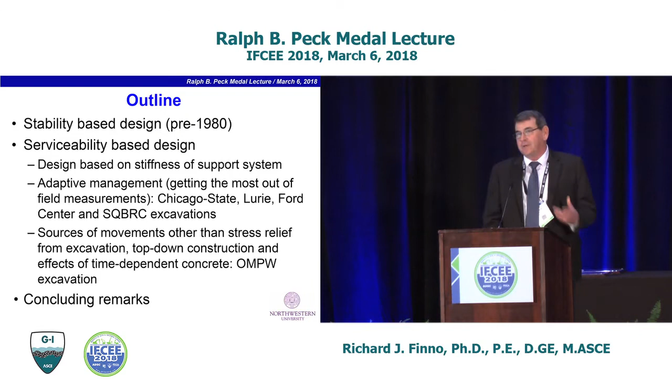That in itself could easily be another lecture. I'll give one example related to top-down construction and how the time-dependent response of concrete can impact lateral movements, and then make some concluding remarks.

It's been known for a long time that if we look at theoretical earth pressure diagrams for sands, like the Rankine diagram, they provide a distribution of lateral pressures where soil pressure increases with depth. Experience showed that this didn't really work for designing supports for excavations in sand. The pressures were actually higher at the top of the cut and lower at the bottom of the cut for excavations in sand.

This was noted by Terzaghi as early as 1936.

I think this is a common problem in geotechnical engineering, and in fact it probably extends to many other things in life, where the great philosopher Yogi Berra said: in theory there's no difference between theory and practice, but in practice there is. He must have been a geotechnical engineer at heart, I think.

So Professor Peck came up with the apparent earth pressure diagrams, the Terzaghi and Peck diagrams. Basically, he solved this not theoretically, but by looking at field performance data. They measured loads in cross-lot braces from a number of sites, and he looked at different soil conditions, sands.

He decided to break it up into sands, stiff clays, and soft clays. At excavation, he would look at the loads in the brace, divide by the tributary area to come up with some pressures, select the maximum apparent envelope pressure at each level, and then for all excavations in a given soil type, define the envelope of maxima.

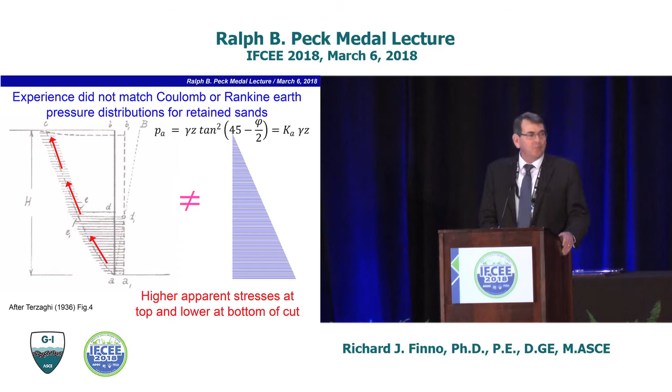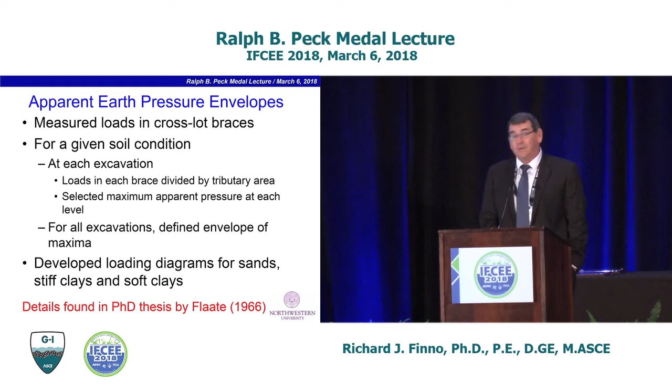All the details of this can be found in a PhD thesis from 1966 by Flaate at the University of Illinois, a very excellent document. If you have the time, take a look at that.

Here's one of the diagrams for soft clays. You can see the database was extensive, nine from Chicago, and those mostly came from cut-and-cover tunneling and the stations in Chicago, from Professor Peck's experience as an assistant subway engineer.

9 from Oslo, 4 from Japan, and 1 from England.

A very simple diagram, a trapezoidal diagram. The ordinate of the pressure is equal to the hydrostatic pressure ratio, not the active earth pressure coefficient, but the hydrostatic pressure ratio as they defined it. That was equal to a function of the undrained strength of the material above the bottom of the cut, the average undrained strength of the material above the bottom of the cut.

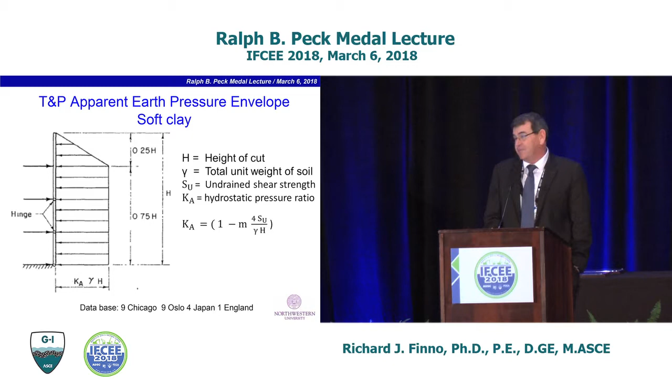This became the standard for designing excavations. One of the reasons you had to go to this approach is that there was quite a bit of variability, and there are many factors that affect strut loads, aside from the obvious earth and water pressures at the time.

Workmanship matters - some of the details can be off, maybe they don't brace very well and you don't get the wales up against the struts or against the wall.

We can look at preloading. You can preload, or you cannot preload. You can preload like this by using two spreaders and spreading apart the wales, or you could put a jack on an individual cross lot. The amount of preload has an impact on the loads that remain in the strut.

Also, in many environments, temperature is very important, particularly if you put your cross lot in during cold weather and it's in service all the way to warm weather. Steel tends to expand, it pushes against the reaction against the wall, and you get some very high pressures there.

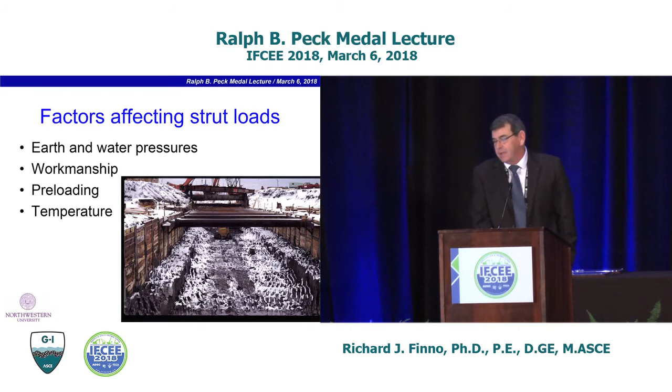All these things make it very difficult to theoretically predict any kind of earth pressures on the support elements. Those diagrams have worked well, and they're still in practice for flexible excavations today in many places.

Most of the data fell in zone 1, but as you got softer clays, you fell into zone 2 or zone 3 with very soft clays to a large depth below the cut.

When those diagrams were first developed, the very soft clays in zone 3 were really Mexico City.

You could also get into zone 3 if you had other problems besides just excavation relief. In particular in Chicago, if you had problems with caisson installation where you had significant soil squeeze while putting in drilled shafts - part of the foundation for the building - or if you had water problems and had to pump from the bottom of the casing, taking out fines, you could get yourself into zone 3 even within very good soil conditions.

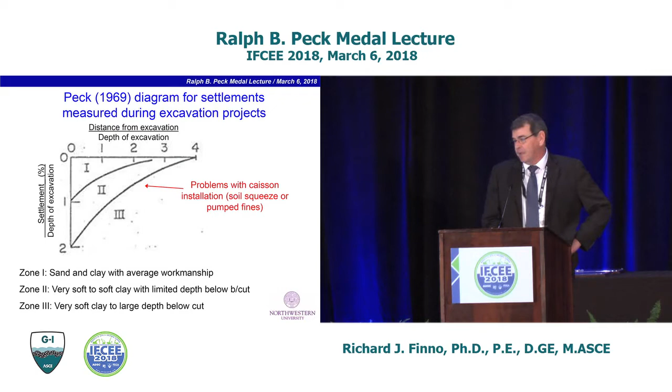What you see is a localized failure - the wale is kind of buckled up there, but it was not really a problem. Because the system was so redundant, the load was transferred to the adjacent wales and the crosslots, they put a little T section at the top, and it was fine. The excavation, in terms of stability, was fine.

Picture that back in the pre-1980s - this was pretty common.

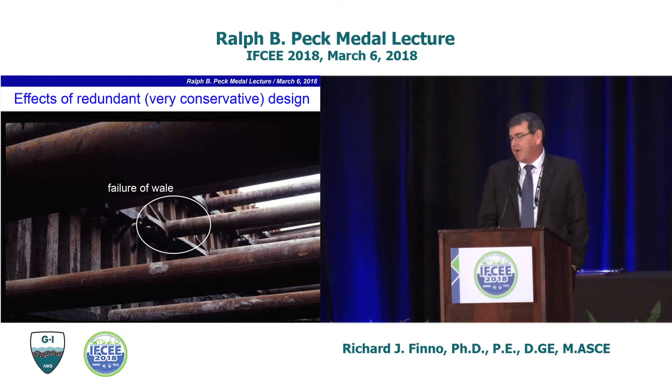So if we summarize stability-based design: first, it arose from field measurements of the loads in bracing, and that was Professor Peck's main contribution. It is a conservative design based on apparent earth pressure envelopes, and it generally leads to a very redundant system. At the time, there was no real serious consideration about the movements that occurred when you made an excavation.

Now that all changed as the 1980s developed - in the 1970s, when deeper excavations were made in urban areas, you started impacting adjacent buildings and causing damage. So it became apparent that there had to be some sort of design for ground movements.

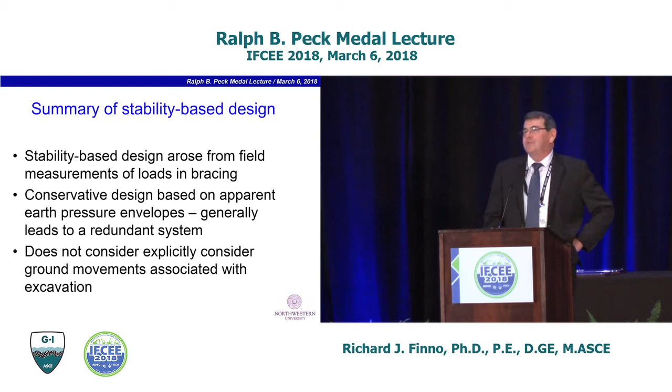If I call it a serviceability-based design, you want to select the support components to maintain ground movements to acceptable levels. Now those acceptable levels, we could easily spend an hour talking about what is an acceptable level for a given excavation in a given situation. We will assume for this talk that we know what that is and we're going to design to that level.

The serviceability-based design really became possible when people started applying finite elements to excavation support problems, particularly the work by Clough and his co-workers in the 80s, which resulted in a semi-empirical approach based on system stiffness and factors of safety against basal heave. Their approach was for clay excavations only.

And today I think it's a true statement that you are not only using finite elements to estimate movements, but you're using it—I've seen it used many a time—to compute the support loads in the bracing, okay?

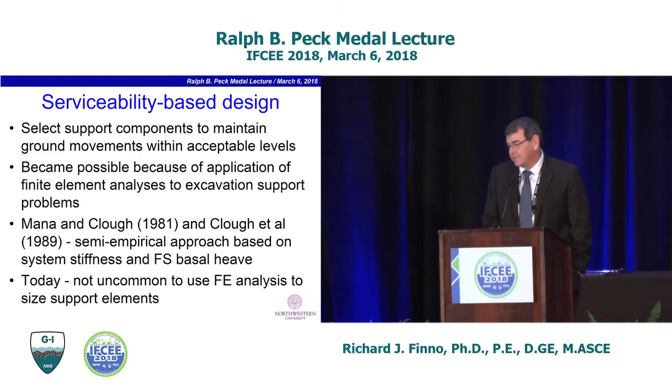So in the 80s then, there was much effort for this, and Clough and O'Rourke in 1990 presented an excellent paper in the Lateral Earth Pressure Conference of that year.

Keeping the same zones of settlement as Peck did, they looked at the plot, the settlement versus the excavation depth. It's the same plot, I think a much better plot because you see where the data falls. They looked at, in this case, about 15 case studies, plotted the data up, and that's a lot of movement, quite a bit of variation.

So one question you might ask: why is all the emphasis on soft clays? Well, if you look at—they did the same thing for the sands and the stiff clays—and if you look at the magnitudes of the movements there, the envelope of the settlements, maximum is typically 0.3% for sands and hard clays, and more likely 0.15 to 0.2% for the movement. So clearly, you get much bigger movements in soft clays, and that's why there's so much emphasis in this area, okay?

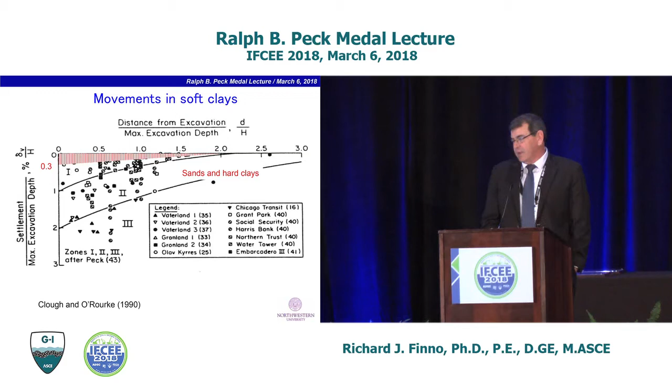So since I'm going to talk about excavations in Chicago, I only want to really talk about the stratigraphy once, so we don't have to look at it again. There's obviously minor variations, but classically you've got an urban fill at the ground surface, overlying a sequence of increasingly stiff glacial deposits.

Sometimes, not all the time, but sometimes there's a desiccated clay crust at the surface, followed by sequences of increasingly strong and stiff clays.

One thing you notice: the Blodgett stratum is the softest of the clays, other than some infills from old channels, and has very high variability in water content. This comes from the fact that this typically is thought to be, anyway, a supraglacial till.

Below that, there's a Deerfield stratum, which is a medium stiff clay noted by very uniform water contents. Below that is the last of what Peck called in 1954 the lake border clays, the Park Ridge stratum, which is also a glacial deposit, over basal tills, locally known in Chicago as hardpan, which can be extremely strong. So that's the basic idea.

Most of the excavations of typical depth bottom out in the Deerfield stratum. So you've got some relatively soft clays below the stratum, and depending on where you're at, that could be significant for relatively significant depths or not.

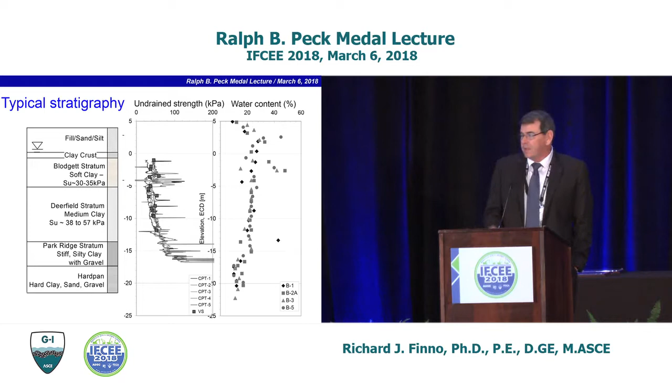So to make movement predictions then, it really depends on the soil conditions, the retention system stiffness, and of course the construction procedure. That can have an overriding effect on anything that we do.

And so I think it's always wise to make this a two-step process. One, look at precedent—many people have done work on making compilations of movements in excavations since Clough and O'Rourke, but there are essential findings that keep being substantiated. So you can look at precedent to get some idea, but you really need to look at some site-specific conditions for a number of reasons.

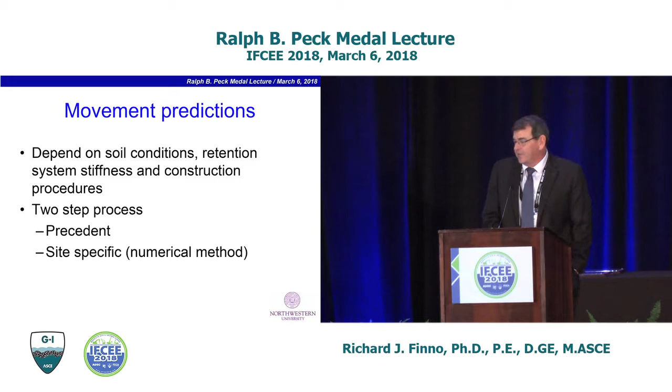And typically that's done generally with a numerical method. So if you're going to do a numerical method, the goal is to make whatever goes on out in the field go on in your computer. You have to be able to accurately simulate construction and have proper finite element procedures, and your constitutive model has to be good enough to represent the response you're trying to represent in the field. So we'll have a little bit more about that later.

And of course, when you're doing this, you need to have instrumentation and field verification. So this is where the field performance and the case histories become extremely important.

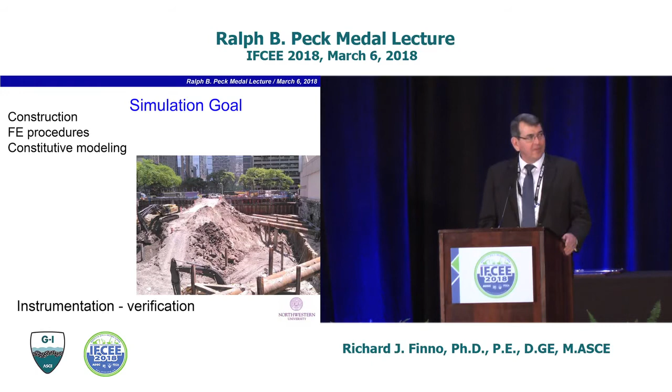I'll first start with the Chicago State excavation. I will talk about several excavations, but one is the excavation that took place at the Chicago State, for the renovation of the Chicago State subway station, which was one of the cases that turned up in the Terzaghi and Peck loading diagram.

The excavation is in front of a 3-story building, the Frances Xavier Warde School. That part of the excavation was a tunnel, designed and constructed with a tunneling operation. The goal here turned out to be about a 40-foot cut, and the 3-story school is founded on shallow foundations. The Holy Name Cathedral, the larger building behind it, was on drilled shafts and wasn't really an issue.

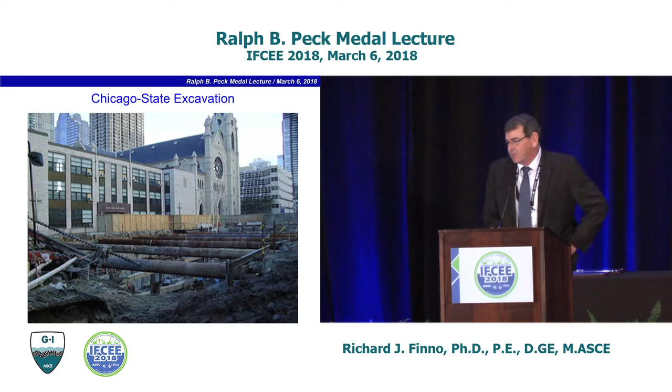Here's the picture of the support system. You can see it's a cross-lot brace at the top with 2 levels of ground anchors, with the existing tunnel that was going to be renovated below that. The Warde School had a one-story basement, about a 14-foot deep cut, so for a 3-story building you're getting a net stress relief on that side compared to the other side of the excavation, which was basically a parking lot. So there were higher stresses on the left side than on the right side of the figure, and you can see the typical soil conditions.

The goal for this support system was value engineering as a last-minute change, because the original design was rejected, and there was no time for any really detailed analysis. This was around the 1990s because of the time constraint. So basically the design was done with the Clough empirical charts and an analysis by a structural engineer of how those perceived deformations would impact the adjacent school.

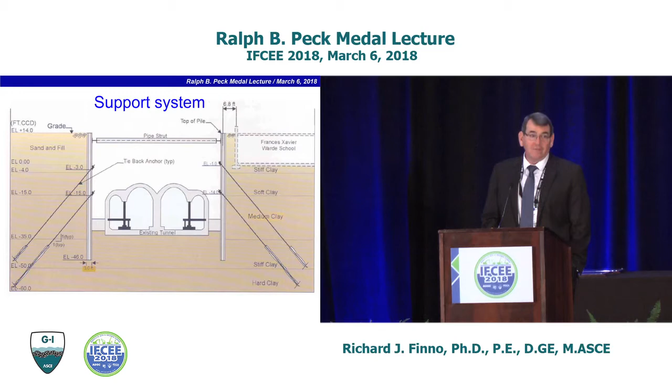We came up with an allowable settlement of 1 1/4 inches. At this time, that was beyond what we were typically getting in Chicago, so there was a very detailed monitoring program.

What you see in red are locations of inclinometers, 3 on the side between the secant pile wall and the school building. The W's and C's are locations of settlement points on the walls and columns in the basement of the structure. Those were monitored weekly throughout construction, and the inclinometers were read several times a week.

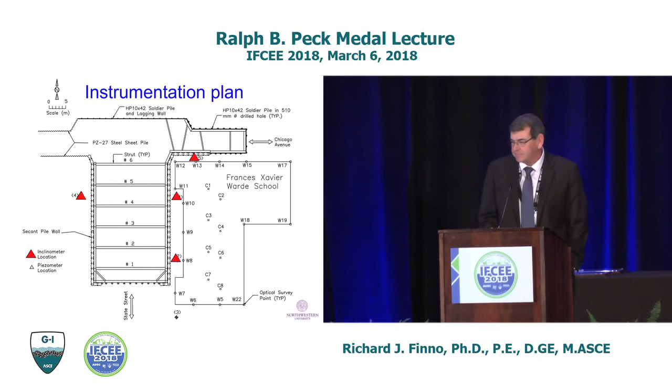This figure is detailed, but it shows everything, and I include it because it's very important to have a very detailed record of construction that you won't find in the daily field reports. You have to look at what the excavation level was at the particular instrument, as well as what was going on in terms of installing a brace.

The markers up there represent when the secant pile wall is installed, and the solid line is the excavation level throughout the process. The sequence was: install, excavate below the first level brace, put the first level brace in, excavate below the first tieback level, install the last tieback level, and then when finally done, reach bottom grade. Then it was open for a long period of time without making a good connection, so there were maybe some minor movements.

What you're seeing is a movement summary on the bottom, lateral movement or vertical movement, with lateral movement shown as colored dots. Those colored dots represent the lateral movements of the inclinometer between the wall and the school at different elevations.

Elevation -3.7, the top blue one, was in the soft clay and represented the maximum movement throughout the process. The other two are at lower depths, with the last one at 11 basically at the bottom of the cut. There was also the school settlement marked by W10, on the lower part of the wall right adjacent to the inclinometer, which tracked the lateral movement in the soft clays.

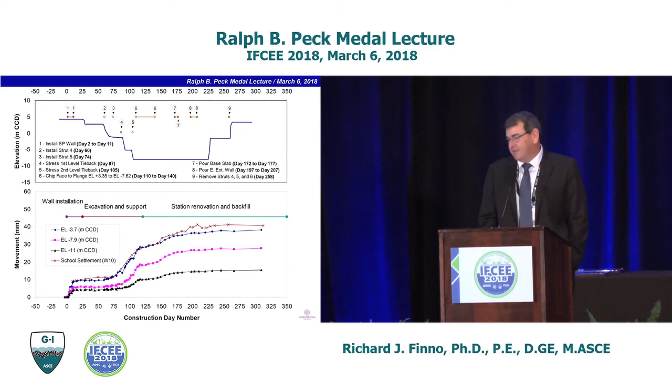So how did this look in terms of more conventional inclinometer and settlement data? Well, this is one of the inclinometers between the school and the secant pile wall on the east side, and you can see that the first data set represents the entire lateral movement during installing the secant piles, and the movement was about 10 millimeters, again, focused in the soft clay. As the clay got stiffer, there were still movements, but they were smaller. And that deformation pattern was reflected in the settlement of the columns in the Warde School.

And then if we looked at the excavation, we got the same sort of thing. Another 20 millimeters of movement maximum, and reflected in 20 millimeters settlement. So these aren't all the inclinometer data, but this is enough to show the general trend.

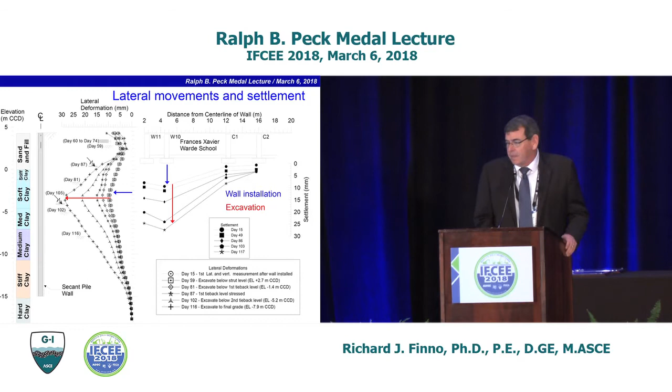So if we just summarize this stiffness-based support, the design and support system, first of all, necessitated detailed performance monitoring. There were provisions in there that if you had to add another tieback level, you could. But the movement levels, initially, was very concerning, but then it became, by basically nothing more than compensating errors, because we forgot to add in the secant pile movement, we under-predicted the movements due to the excavation, and so it worked out fine. Like many things, you'd rather be lucky than good.

So the requirement then, though, because we were looking at such small movements, allowable movement of 1¼ inch was pretty unprecedented in Chicago at the time, and you really have to think about all the different sources of movement. And so the secant pile wall installation and the long-term movements were something that eventually have to be considered.

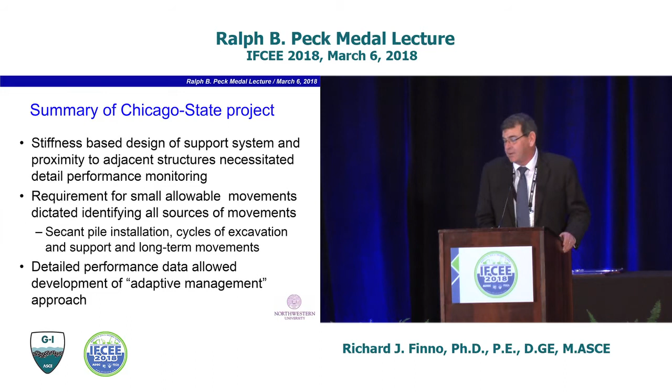But what I brought this case up for to start with is that because we had this detailed data, it allowed us to develop what I might call an adaptive management approach to this. So basically what this does is you quantitatively evaluate the performance of a system based on field observations. And if you make these observations early enough, you can use these observations to update your performance predictions, and you plan the project so that alternate procedures can be applied depending on the observed performance. So this is definitely a design approach.

You think about these things in the beginning, you make your predictions, you get your target levels, and you provide alternatives at that time. The Chicago State project, for instance, it was clear that we were never going to prevent any kind of damage in that building. The target was some minor architectural damage, which I'd like to present, but not enough time.

So the fact was, though, that by doing that, at the beginning, the contractor was allowed to put in a bid item in his package to allow to pay for any damage to the structure. And between that cost plus the cost of the secant pile wall was much cheaper, saved a lot of money compared to, say, a structural slurry wall that was a possibility. And, well, it was still much cheaper. And I don't know if you would have gotten less movements with the structural slurry wall in any case.

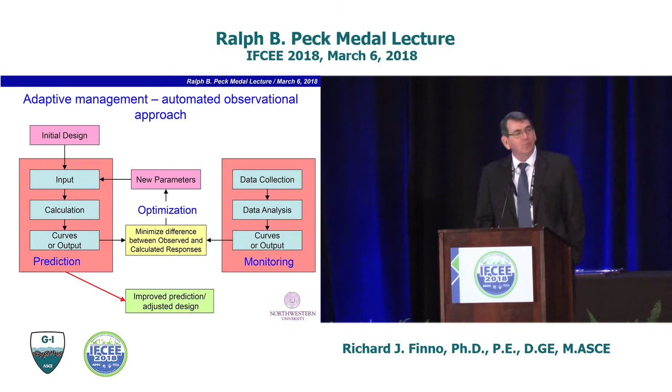So then what we do is compare those two. We minimize the difference between the computed and observed responses using an optimization routine, develop new parameters, and with those new parameters you can predict the performance as you go on.

So I just want to show exactly what I mean by this. You start out with a finite element run, and you compute an objective function. That objective function is nothing more than, y is the observed lateral movement at depth, and y prime is the computed value, and y prime sub b is the computed value as a result of a change in b, which is one of the performance prediction parameters. So that's the sum of the squares for the objective function we're using, and W is a weighting function.

To do that, we use a gradient method for optimization, where you compute the sensitivity. For each particular parameter, say a stiffness parameter in 3 or 4 layers, you perturb it by a small amount. That's the only thing you change in your simulation. You get your change in the response you're trying to get, in this case lateral movement with depth, and you use that to come up with the sensitivity matrix, the rate of change of the value with respect to the change in the property.

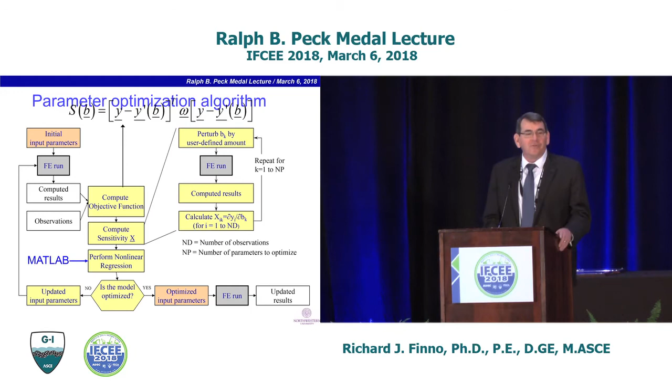So we do that, say 5 times if we have 5 different parameters, and once you get that you perform your nonlinear regression with that sensitivity matrix. That can be done with MATLAB, it's a standard off-the-shelf procedure now. Then you check if the model's optimized. If it is, you come up with your new parameters and make a new finite element run. This whole sequence can be linked together with macro programming languages, and it takes 4 to 5 hours on a PC for a 2D run. So it's something that's very reasonable to get.

So the key elements of the approach are, first of all, the prediction method, the finite element method. But keep in mind you can't always get all aspects of the construction process modeled correctly. You have to have the observations reliable, accurate, and in timely fashion. When we started this business, this was the hardest part, getting the data back. If some outside agency took inclinometer or survey readings, you wouldn't see it for 2 weeks, and by then you were gone and there was nothing you could do about it. Nowadays things have picked up considerably, and we'll talk about that later. The constitutive model has to have the capability to replicate the behavior you're trying to observe, and what's really good about this is, remember, when you start out in design, you have to predict the construction procedure, which is as hard as anything else in our experience.

But the value of this is that when you come to making the analysis at a given stage, you take the records, you know the construction procedure, so that becomes a known and not unknown. The other thing is the contingency, to make this work at all you have to think about this in design and have your contingency options prepared in the design phase of the project.

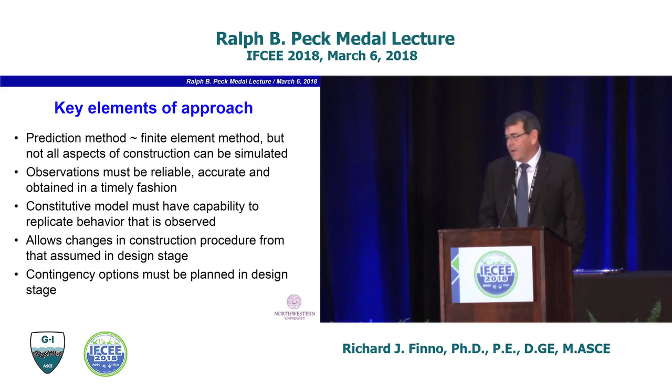So I just want to show very quickly how this was used, again this is the Chicago State project, where we optimized the parameters at an early stage of excavation to come up with the predictions later on. We used the computer code Plaxis, Plaxis 2D, I forget what version because it was a while ago. We used MATLAB for the optimization routine, and the hardening soil model, which is a nonlinear elastoplastic model. We used a stiffness parameter called E50 reference. That E50 reference is kind of a plasticity parameter, not an elastic parameter, but basically the secant stiffness at 50% stress level. The reference refers to the fact that you can relate that to the vertical effective stress, so one parameter can go for a soil deposit where the stiffness increases with depth. That's a stiffness parameter, and you do that for several soil layers.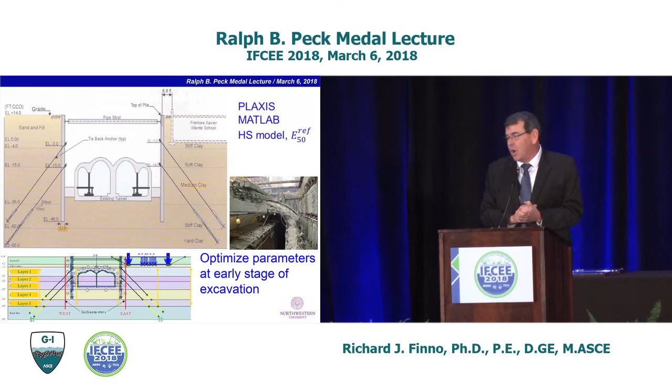The model we had is seen here, and what you can see is that these red lines represent the 2 inclinometers, one on each side of the excavation, that were used as the basis of the prediction. So those were our observations, we had data on both sides of the excavation. The simulation included simulating the tunnel to get the right stresses in the ground, simulating the construction of the school, simulating the excavation and installation of the walls, and then the normal excavation sequence.

So here's the first set. We started with soil parameters that came from tube samples, fixed piston samples, even in the soft clay, without any corrections, because we knew there would be some disturbance. Typically you're going to get a softer response predicted directly from the laboratory results, no matter how careful you are. So what you can see on the top row is the 5 stages.

Stage 1 is installing the secant pile wall. Stages 2, 3, and 4 are when the excavation was below each level of support, and stage 5 was at the bottom of the excavation.

On the east side, those were all 5 stages, but the inclinometer was protected between the school and the wall, with no construction equipment. For anybody that's worked in these situations, you know that if you're not really careful and you leave instruments exposed, they tend to be destroyed. So we made the inclinometer on the west side of the wall last through only 3 stages of excavation, so we at least have that data.

The solid dots represent the observations from the inclinometers, and the predicted are the open symbols. Clearly we got larger deformations predicted using the exact construction procedure, and this is after the fact.

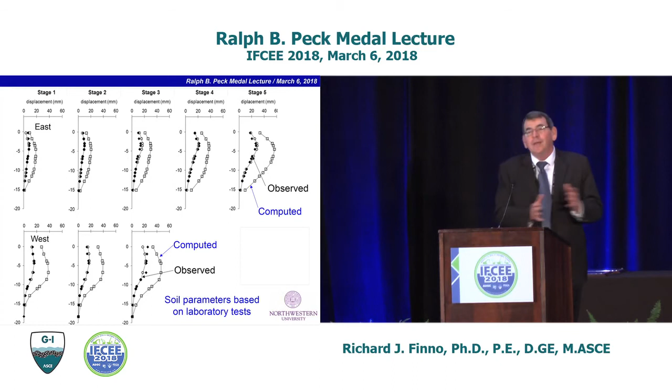So again, soil parameters are based on laboratory tests, and we wanted to know this when we were starting out, because we knew the correction should be the other way. We would think that if we start with a softer parameter, the parameter should get stiffer, so we know kind of what's going on.

So what we did then was use that first stage as the optimization, when the secant pile wall was put in, and optimize that data set — inclinometer on one side of the wall, inclinometer on the other side. We got best fit parameters based on that, and ran through our analysis.

And of course, for the first one it's a good fit because you're making it match, all right? But then for the rest it's not a prediction, it's a computation based on the results of the first analysis, stage 1, and you can see the improvement is significant.

In fact, we're able to pick up, say, if you look at stage 3, by that time you even have more movements on the west side due to the larger loads there than on the east side. That was picked up with the simulation and the parameters that were developed. So I think we were pretty successful in that.

Okay, so that was good. So now we have a method that you're able to come up with a set of parameters based on field observations, not just laboratory data. So then the next step would be, well, what about using those as starting parameters for other excavations in similar areas?

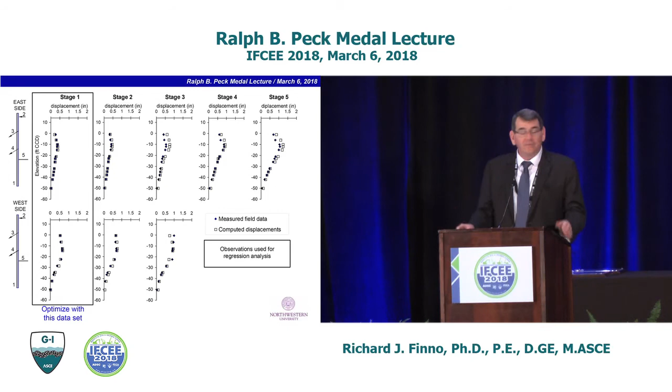So another excavation we worked on was for the Lurie Center in downtown Chicago, and we made this simulation. This was a significantly different support system — a sheet pile wall supported by 3 levels of ground anchors. And we looked at a plane strain analysis here.

So what we wanted to do was, again, using this. The ground conditions were a little bit different here because this is closer to the lake. You have a beach sand deposit that goes down about 5 meters, but then you've got the soft to medium clays, stiff clays, and hardpan again.

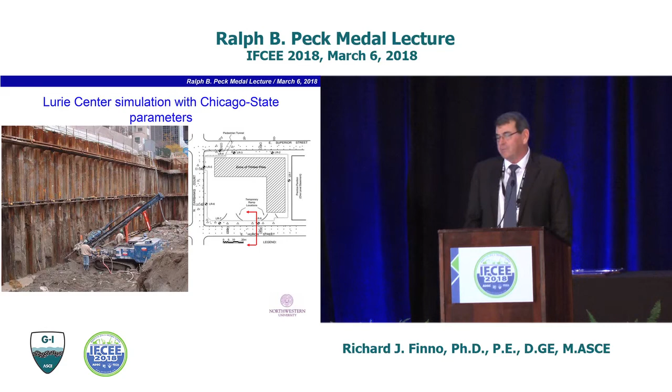You can see this is just a computation with the actual construction procedure, again with the Chicago State parameters, looking at the results from the computed value. The field data is the open circles. Plaxis was the platform we used for the computations.

And you can see in the beginning of this, we're over-predicting the movements, okay? But as we got more and more deformations, we got a much better prediction, and by the end of excavation that's a pretty good estimation of the ground movements, all right? But in the beginning, we weren't. This is one of the limitations of the model we'll talk about in a minute.

So that was one project where, again, using the Chicago State parameters, we adjusted a little bit for the differences in stratigraphy, and we get a very good fit.

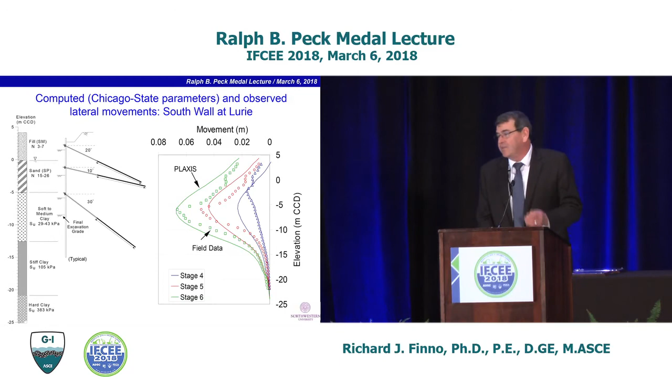We did the same thing for a Ford Center excavation in Evanston. And this is, again, a different excavation support — sheet piles, but now with 2 levels of cross-lot braces. There was a building that was fairly close, supported on shallow foundations, so the movements were a concern here as well.

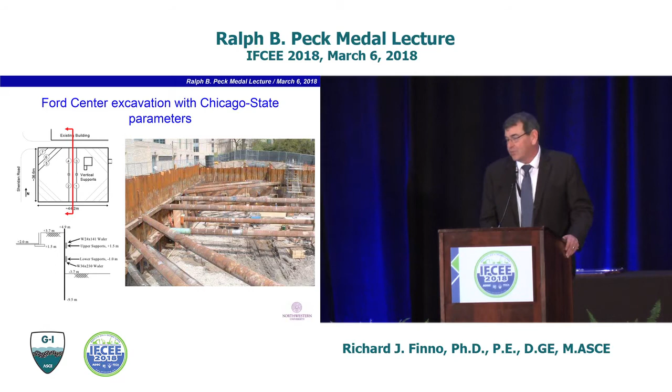And so this was going to be simulated again. We took a cut all the way through the building just to get the difference in stresses on both sides of the excavation. Once again, when you look at the computed values with Plaxis and Chicago State, they are bigger than the field values, but these movements are small—about half the movement we were getting at Chicago State. So clearly the model we used in this case could not take into account that entire strain range.

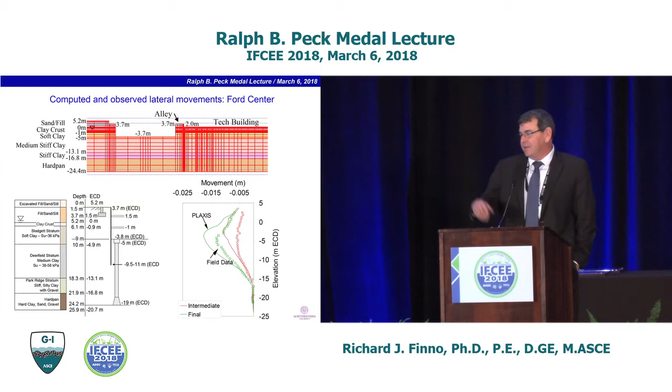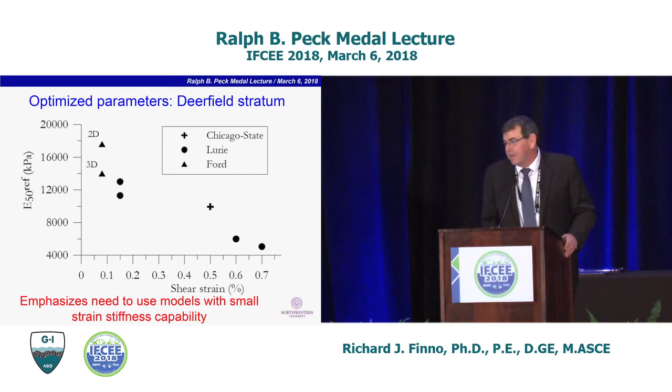So if you're going to make these predictions at early stages, you need to have that small strain stiffness built into your model, or you're going to keep changing the parameters—which as an exercise is okay, but not really predictive. So as part of this work, we always would go out and cut block samples from the excavations.

We'd bring it back into the lab and do a little more detailed testing, including bender elements at the top to get the shear wave velocity based on wave propagation, and then internal instrumentation to get better measures of shear strain in the soil, giving more accurate measures of that.

So we did this on a number of excavations. It's good to be the professor here, standing here, and not being the poor students down here. But I will cop to the fact this was our 3rd time we did this, and my back hurt, so I couldn't get down there anymore. That was my excuse, and I was sticking to it.

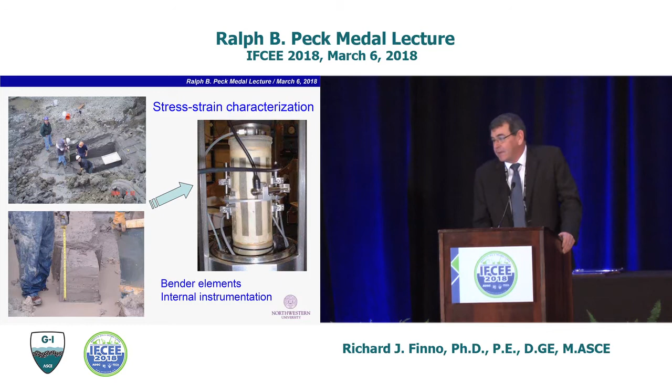So this is a typical result from one of the excavations we made. This is called Block 37. What we're doing—the plot here on the left is shear stress versus, this is an effective stress plot, so somehow the Q—that should be shear stress versus mean normal stress. These samples were K0 consolidated.

Again, these are the block sample results. These materials were lightly over-consolidated, so we brought it back to the vertical effective stress and then sheared it. So what we plotted is the shear stress versus shear strain relationship that we found from our data.

This is based on normalized shear modulus. So this is a typical plot you might see in earthquake engineering, where you plot the ratio of the secant shear modulus versus the small strain shear modulus.

The limitation of the models is this: at best, if you're measuring your data in a conventional triaxial cell, where you're measuring movements outside the cell by looking at the rod going up and down, you're not going to be able to measure better than about 0.1% strain.

So if that's 0.1% strain, and your average strain is maybe down at about 0.01%—so your average strain is over here somewhere—then you can see that you're going to miss quite a bit of stiffness there. And all that increased stiffness is going to make a difference in any kind of movement prediction you're going to make. The problem gets worse if you have a simple model.

Now, this model is the hardening soil model, which was not completely nonlinear from the start of deformation. If you took any kind of elastic, perfectly plastic model where you represent the behavior as one shear stiffness, G, how do you pick a shear modulus depending on the direction of loading or the strain level and expect to make any sense out of a movement prediction? You can't. At most you get is an approximate. Simple models are good for looking at stability problems, potential basal heave problems, but in terms of deformations, you can't use it.

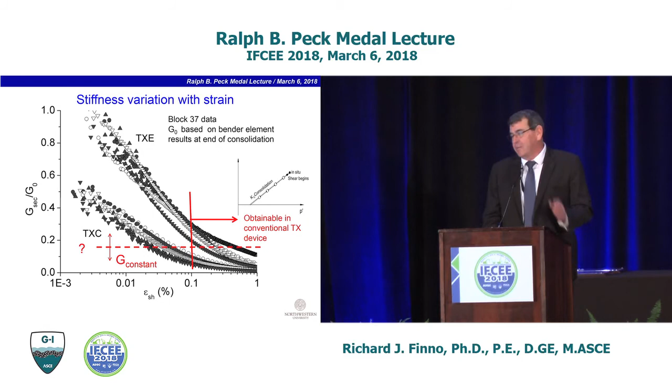And so to really show this, you can look at some simulations with the same basic model parameters, as much as possible, between Mohr-Coulomb, hardening soil, and hardening soil small, which just has a small strain overlay on top of the conventional hardening soil model. What you see is that the Mohr-Coulomb always under-predicts the maximum settlement and gives you smaller distortions, but over-predicts the extent of movement—the settlement trough goes out further.

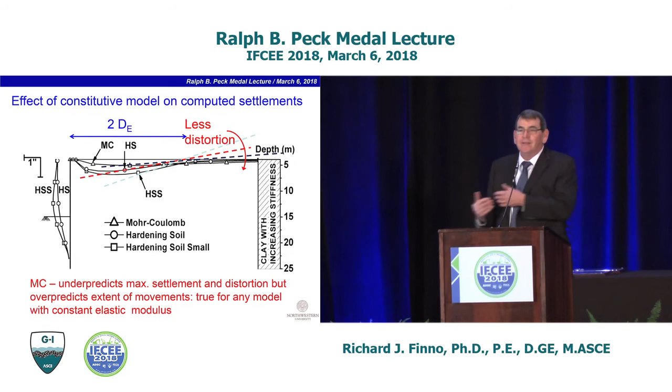As you get more complicated and get down to the hardening soil small with small strain stiffness, you get more settlement in a shorter area. That means you get more distortion. And if you have a building behind it, the more distortion you get, the more damage you're going to get. So you want to be able to look at that.

So enough about that. I want to use this project that was recently completed, the SQBRC excavation, another one in Chicago. It was a sheet pile wall supported by 2 or 3 levels of tiebacks. You can see the ground anchor line, the tiebacks here, large cross braces. There's the 3rd level of tie.

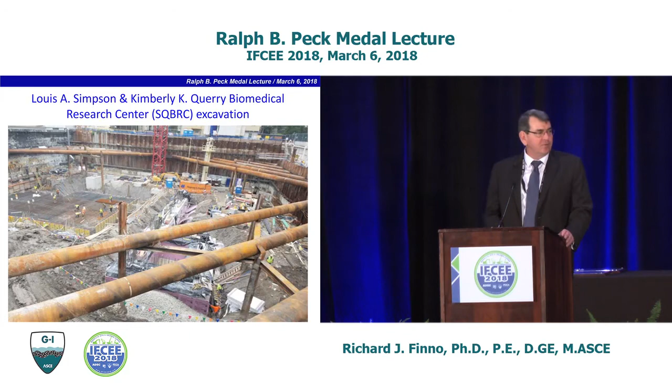In some locations, there was a little bit more excavation locally, and the 4th level of tie was put in. But again, sheet pile wall with several types of excavations.

Here's just a cross section. Again, this was closer to the lake, so you had the beach sand, the medium clays and stiff clays that were the soils being optimized with the data.

But by this time, this was a recent project, and things have gotten much better. We use shape acceleration arrays. This project was done with our partners Hayward Baker and their company G-Tech. G-Tech developed a great project website where you were able to take the shape acceleration arrays, so these are your in-place inclinometers.

The data would get to the website basically in real time. There was a robotic total station to get settlements in real time, and that went to the website too. There was also a web camera, so if you weren't at the site, you could at least keep track of what was going on. I mean, you still need to go out and measure things, but it helped a lot.

In the project website, what we're able to do is take the data in real time, say 10 minutes after it gets posted, pull it off, do our optimization process, and put it back in and have an updated prediction in about 4 hours, which I think is pretty good.

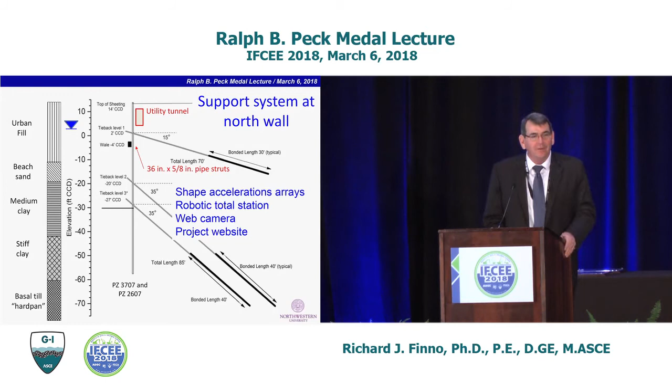The project website had the design predictions and then our updated predictions as we went. And that was for the people, the stakeholders in this particular project, to be able to look at.

So here's the typical deformations, lateral wall movements versus the maximum lateral wall movements. In this case, values were taken at the elevation where the maximum value occurred. These are 2 shape arrays on the north wall. This is the excavation sequence in front of those 2. And what we'll do is look at what happens at stage 3, 5, and 7.

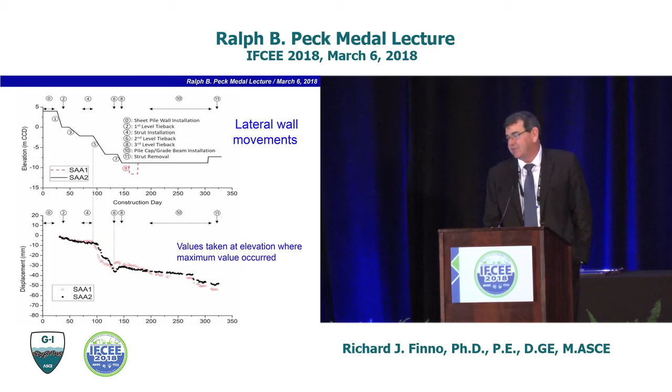In this particular case, you can see the movements are about 40, 45 millimeters, 1.25 to 1.5 inches. And they accelerate greatly when you started excavating into the soft clay. So when you stress the soft clay, that's where you get your movements, not too surprising.

So this is just the wall movements as the excavation goes below the strut. The strut, in this case, is marked by this black line. That's the cross lot that you saw. And as you excavated below that, that was stage 3.

So by stage 3, that's this data here - let's go back one. You can see that you had maybe about 2/10 or 4/10 of an inch of movement in the soft clay, and in the stiff clay, you were less than 1/10 of an inch. So it's more than likely that wasn't enough movement to be able to optimize with any degree of accuracy.

So what we did was look at what happened between stage 3 and 5, and that's when you first got into the soft clay. Good design - they put the strut in, well, good for number 1, because the strut is put in to avoid problems putting an anchor through a saturated sand, through a sheet pile wall. But 2, you're getting the excavated level as soon as you can, getting the support in as soon as you can before you get into the soft clay. So that minimized the step.

But you still see 3/4 of an inch of incremental movement during that time. So we had large incremental movements there. Then as we got to stage 5, we went down below the next level, and you had a little less movement, but still continued movements as you went on.

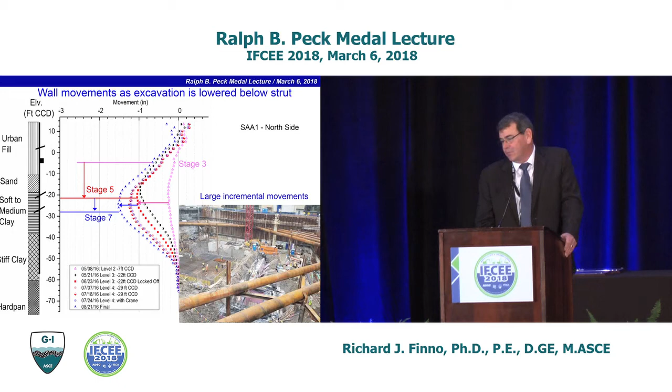So to be able to evaluate this, we wanted to look at it using Plaxis, MATLAB, and we used the hardening soil small model here.

They have cross-hole seismic data and CPT data, so we know the actual G0 pretty well at these sites, but we didn't know the degradation, so that was the parameter we optimized.

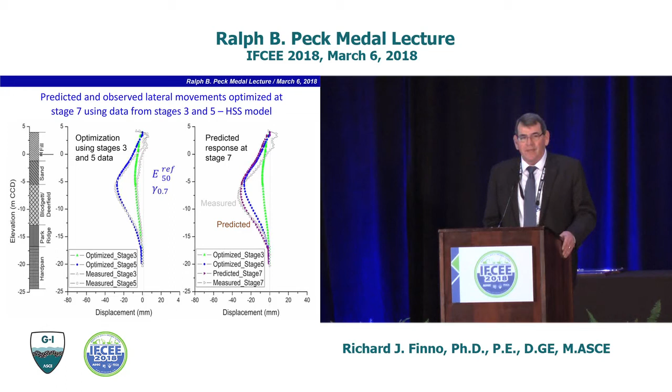But on the other hand, when you look at stage 7, which is really a prediction that we put up on the website, you saw that the prediction was very good. I don't think you can get much better than that. We were very happy, but you need some movements to start it.

So how do we summarize this? The current capabilities are plane strain simulations. Ideally you'd like to go to 3D, because you have to wait until you get more or less plane strain conditions at an instrumentation location to apply your model. So 3D would be good, though there are still a number of issues with that.

I think the soil model should include small strain stiffness, and updates are possible in near real time, 3 or 4 hours after the data set, if you have the right instrumentation and data acquisition system out there. You can remove uncertainties with the construction procedures because you apply the process when you get down to a particular level.

It's a design approach if contingencies are included, and hopefully that's what's done - there's no reason to do this without that. And then, you cannot simulate all activities.

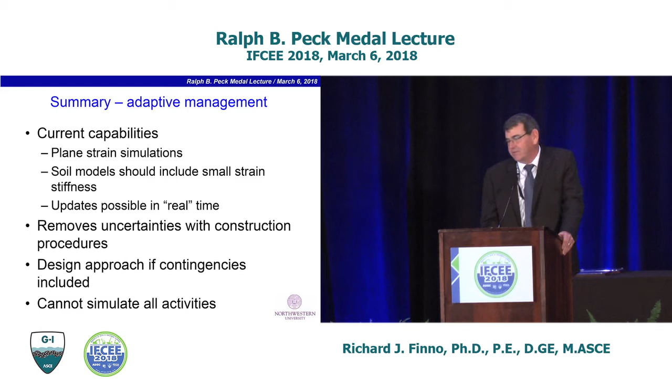I'm almost at the end here, and I just want to emphasize that there are movements from causes other than excavation. I'm not the first one saying this, but many times when it comes to design, people forget about adding these things in.

So when you make site preparation, you could be removing foundations - you wind up taking big hunks of concrete out, you break them up, and that induces vibration. You're removing stress, moving soil from the ground, and that can induce deformation. Then there's wall installation.

We talked about secant pile walls, but slurry wall is the same way. Sheet pile walls get permanent deformations - you're displacing soil, it's a solid element going into the ground, and it forces the soil off to the side. You can get densification during driving if you have loose sands at the surface; those will densify locally when you vibrate a sheet pile in. And installing deep foundations can cause ground movements that can be significant.

But one thing that hasn't caught a lot of attention is concrete shrinkage during top-down construction. Top-down construction is really a construction expediency: you put your walls in, your deep foundations in, cast your upper slab, and then you go up with your building while going down at the same time. That stretches out the excavation time, so the excavation is not on the critical path, and it takes a lot longer.

So one thing you might think about is, when you cast your slab, those slabs are typically integrally hooked into the wall, so you get almost a full moment connection. What happens is there's material dependence of concrete, and one of those components is shrinkage, which is going to pull - inducing strains that pull the walls together.

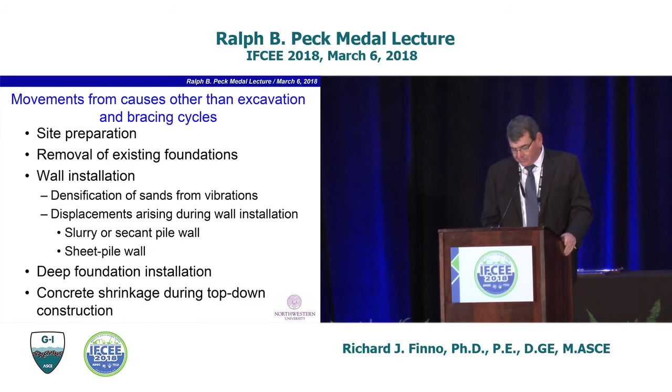So I just want to illustrate this quickly with the One Museum Park West project, which was a 53-story structure with a 50-foot deep basement.

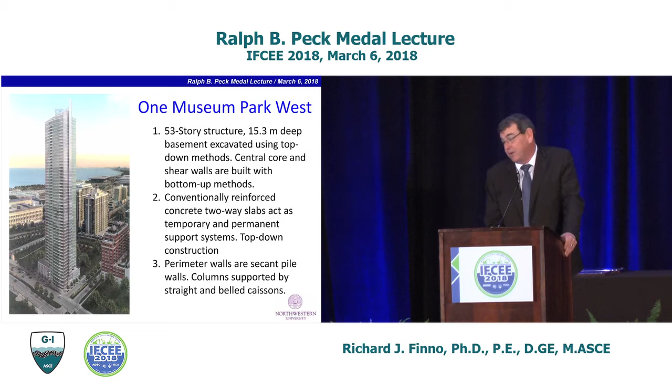There was a central core with shear walls, and that part of the building was constructed with bottom-up methods, using conventionally reinforced slabs for support, which were used for permanent and temporary support for the wall system during top-down construction. Secant pile walls were installed, as well as columns by straight and belled caissons. Straight shafts went to rock, belled ones went into the hard pan.

One unique part about this is we put in a number of strain meter stations, with vibrating wire strain meters at the top and bottom of the floor slabs on four levels. The purpose was to quantify the components of the axial loads in the floor slab and try to relate the strains we developed to the shrinkage, and how much movement would be caused in the system by shrinkage.

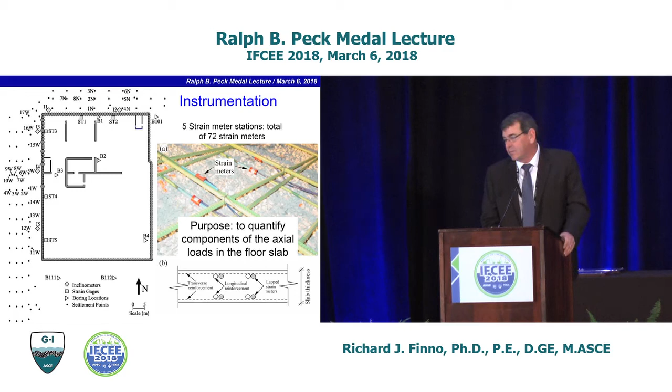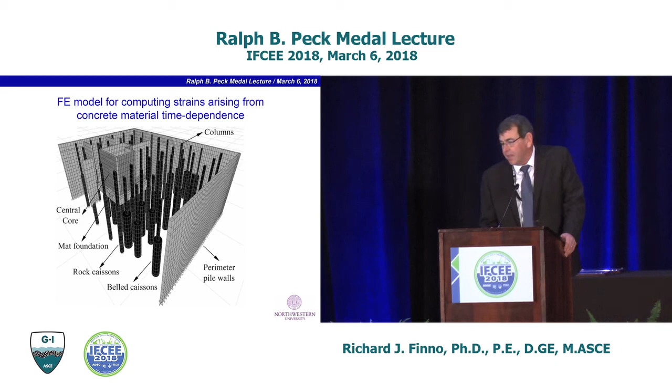The way this was done was sequentially. At day 90, just the secant pile wall was put in. The drilled shafts were put in next, then the central core mat, and then the core was done. Then we get to the point where we put the first floor slab in.

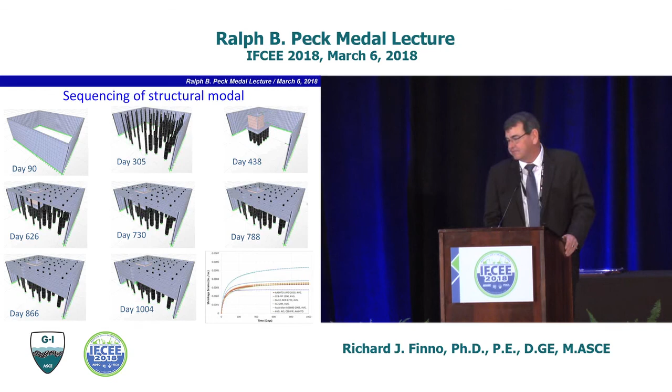There was no soil on the outside of this because we were just pulling the soil in, and we had beams on the inside representing the soil resistance due to the passive resistance. So what we were able to do was compute, with the model, the open symbols there, which is the material time rate dependence at various stages.

So stage 9, 14, and 18 - 18 is basically at the end of the excavation. You can see that you get up to, again oddly enough, about 10 millimeters of movement of the 30 observed, but that's only observed during top-down construction.

That's a significant part, so you want to make sure you take that into account. But if you're using the inverse procedure we're having, one main assumption is that since construction is known at the time we make the analysis, the differences in the observed and computed response are strictly due to the soil response and the soil parameters we picked. But if you don't take this into account, you're assuming you're getting, say, 30 millimeters of maximum soil movement, when actually the contribution was maybe 20 millimeters of soil deformations.

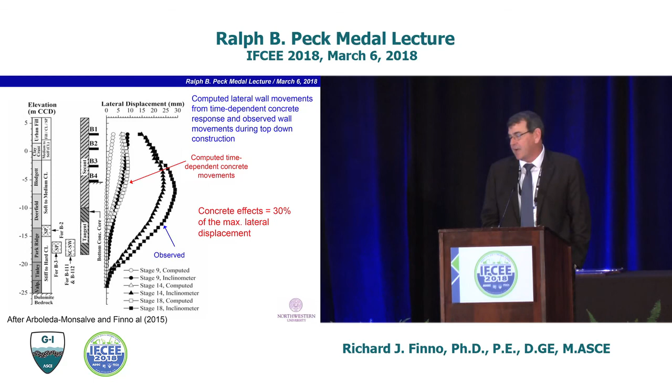So to sum this up, 30% of the maximum lateral wall movements for this case - but it's important when the allowable movements are small. More and more, in Chicago, if you just have utilities, a 2-inch lateral movement anywhere is the target, so something like 10 millimeters you don't worry about too much. But once you start getting down to 1 inch, which is happening in more and more locations, you have to be really careful about what you add into that movement prediction. This is why you have to identify all the sources of movement.

So if you're going to use the adaptive management approach, these movements will need to be estimated so you don't attribute the stress changes due to stress relief, just truly that.

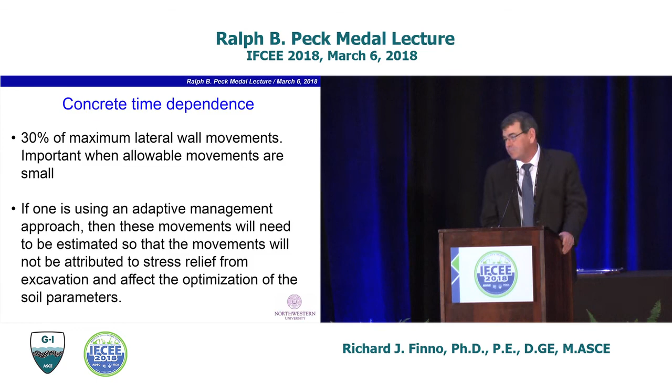And so finally, some concluding remarks. I think field observations still form the basis of design of excavation support, whether it be stability or serviceability. I think the legacy of Professor Peck is still there. I think the process of predicting, monitoring, and updating - adaptive management - is nothing more than an automated observational approach when you get right down to it. I think that's a very useful design tool.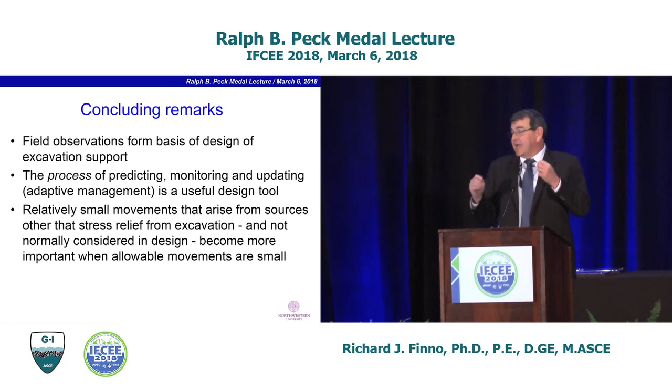The relatively small movements that arise from sources other than stress relief, not normally considered in design, may become important when allowable movements are small.

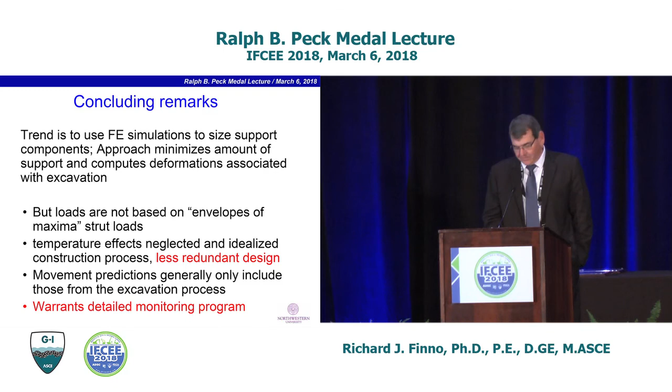So one last thing, to quote John Wooden: I think it's what you learn after you know it all that counts. And if I could be as successful as John Wooden was in my business, I'd be very happy. So if it's good enough for him, it's certainly good enough for me.